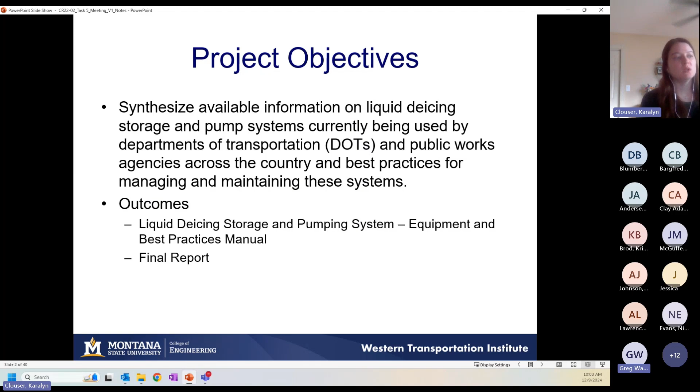Perfect. Thank you, Greg. Thank you, everyone, for joining us. This is the final webinar for best management practices for liquid de-icer storage and pumping systems. So today we're going to go over the content of the final report for this project. And just as a reminder, the goal of this project was to synthesize available information on liquid de-icing storage and pump systems currently being used across the U.S., and then the best practices for managing and maintaining these systems. So the two major outcomes of this project were a standalone best practices manual and then the final report, which we're going to go over today.

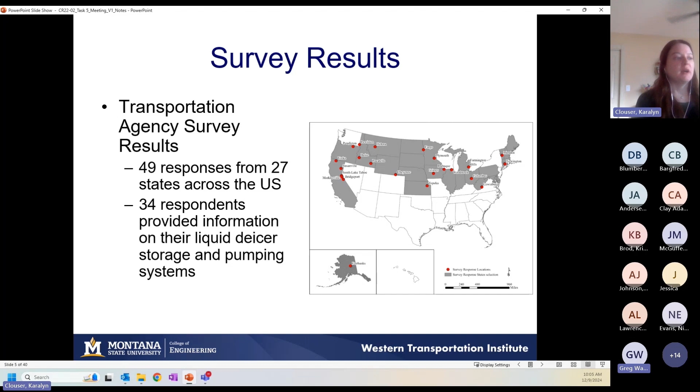So jumping into the survey, it was used to collect information on liquid de-icer storage and pumping systems that were being used across the U.S., and then those best practices and lessons learned from those that have been operating and maintaining these systems. The survey received a total of 49 responses from 27 states, and 34 of the respondents provided information about their storage and pumping systems. And what we found was there was not a consistent system being used across the survey participants. Instead, they helped to identify 19 manufacturers and 5 equipment suppliers of storage tanks, pumps, motors, and those fittings and piping.

Focusing in on the lessons learned from the survey respondents, respondents were asked to share what parts they saw commonly failing or those parts that they're keeping on the shelf in case emergencies happen. So pumps, fittings, and hoses were by far the most common responses. Several respondents had noted failures as a result of needing some sort of preventative maintenance plan, including the need to keep this system cleaned and circulated and making sure that pumps and fittings are checked regularly. Nebraska DOT shared the need for operator training in order to reduce errors, and another respondent had specifically assigned personnel to keep their systems regularly cleaned and maintained.

Several respondents highlighted failures in their pump systems. This included Caltrans, who mentioned that they had needed to switch from those plastic pumps to stainless steel pumps, noting that the plastic pumps were failing after just a single season of use. Maryland DOT mentioned having issues with their system auger jamming during cleanout due to using dirty salt, and that because of this, they were now requiring salt vendors to provide solar salt.

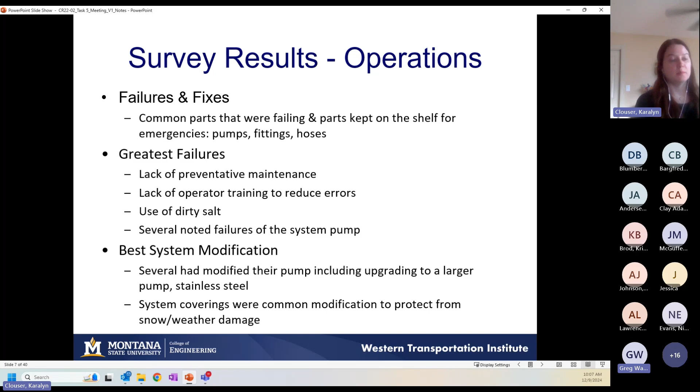Respondents were also asked to share details on the best modification that they had made to their system. So several had modified their pump as a result of failures. And this included either upgrading to a larger pump or going from those plastic pumps to stainless steel ones. System coverings were also a common modification to help protect the system from weather and snow damage.

Several lessons learned were shared by the survey participants. Number one was keeping the system clean and making sure that the material that's stored in the tanks is being regularly recirculated.

This would, keeping things clean, include cleaning and lubricating pumps, flushing out pumps at the end of the season, using fresh water, and using clean salt if possible to avoid buildup in the tanks. Again, preventative maintenance was key. Massachusetts DOT noted that a lack of preventative maintenance was their biggest failure, and that since implementing a preventative maintenance program, they had been able to increase their operations while reducing failure.

Both the city of Columbus, Ohio, and South Dakota DOT noted that limiting the number of staff who operated their brine system had helped to reduce issues and ensure that the system was being operated and maintained in a consistent manner. Oregon DOT shared that they label all of the lines in their systems with the correct flow pattern to quickly isolate any system failures. And then finally, Idaho Transportation Department shared that they were protecting their system from snow sliding off of the tanks and hitting system plumbing by repurposing old traffic signs and creating little A-frame coverings.

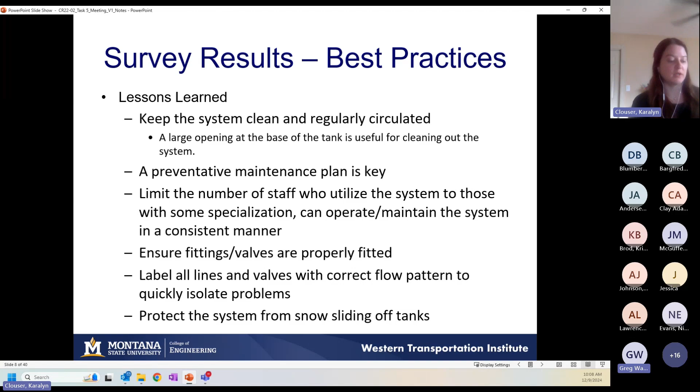So after the survey, we followed up with several of the participants to learn more about their system and some of the best practices that they had shared in the survey responses. Through this task, we were able to follow up with Alaska, Farmington Hills, Michigan, Iowa, Idaho, Kansas, Maine, Massachusetts, Nebraska, Oregon, and South Dakota. I'm just going to run through the key takeaways and common findings from these interviews, but I do want to highlight that several of the best practices found in this task are in the best practices manual, which I'm going to talk about in a little bit.

So for the liquid de-icer storage and pumping system facilities, several agencies mentioned to be prepared for your system to evolve over time and to not be afraid to get started and to start simple. This came up with the Iowa DOT interview, where they talked about starting with a really grassroots approach and then building up their storage system over time as they had funding, and with the city of Farmington Hills, where they started out pre-wetting their salt using an overhead shower bar and have since built a state-of-the-art indoor liquids facility back in 2015.

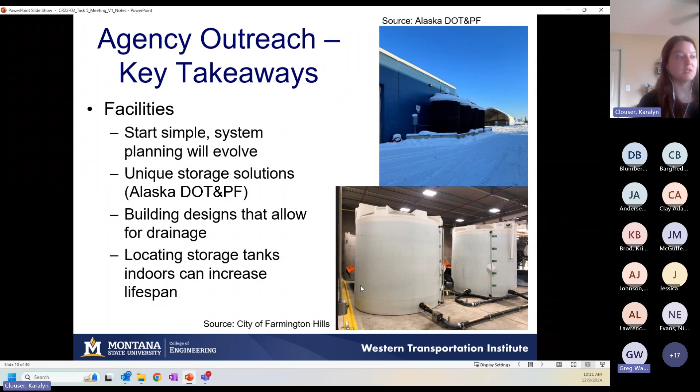City of Farmington Hills talked about their indoor liquids building, there's one picture of it here at the bottom, where they had designed this indoor liquids facility to have a sloped floor. So any liquid or debris that gets spilled moves down the slope into a pit area that they can then clean with a Vactor truck. Finally, several of the interviewees noted that ideally storage tanks would be located indoors in order to reduce UV damage and increase the lifespan of their tanks.

Key takeaways for the storage tanks themselves. Having tanks on a regular replacement schedule can reduce those catastrophic failures. Idaho Transportation Department specifically noted that they replaced tanks on a 10 to 12 year cycle after they had 4 tanks rupture at 2 separate sites. Kansas, Nebraska, and South Dakota DOTs were utilizing fiberglass tanks, so they were unique from the other interviewees. They chose fiberglass because they found that it didn't fail catastrophically and instead tended to leak or seep. Another benefit was more precise fittings, and they found fiberglass tanks were cost competitive to poly tanks, particularly with larger capacity tanks.

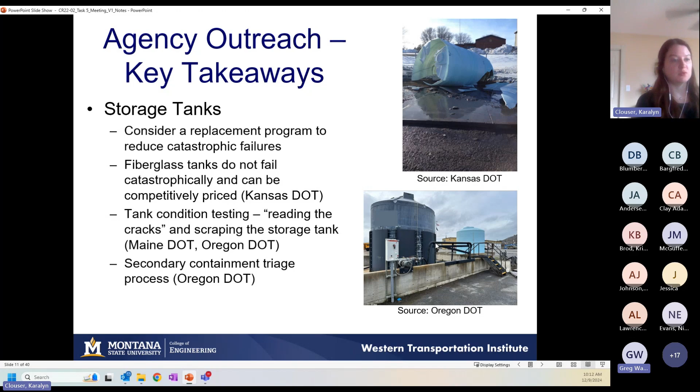Several tank condition testing methods were identified in the interviews. I'm going to highlight these later in the best practices manual section. Most of the interviewees that we talked to did not have or need any form of secondary containment for their storage tanks. However, for those that did, concrete barriers were by far the most common, as you can see here on this picture from Oregon.

For the pumps and motors, all interviewees were completing some form of end-of-season maintenance for their pumps. At minimum, this was flushing that pump out with water. However, several were also applying a corrosion preventative, and this was typically RV antifreeze or windshield washer fluid.

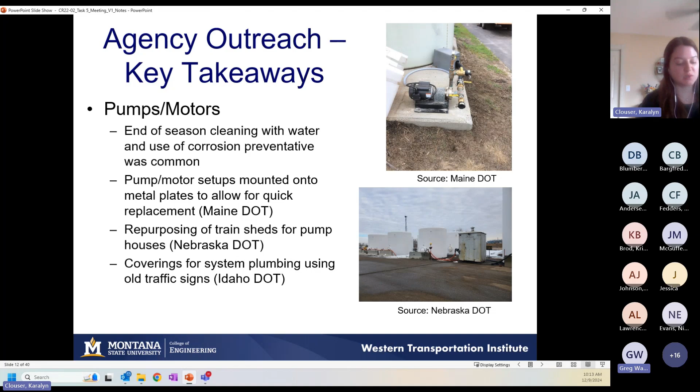Nebraska DOT shared that they had repurposed train sheds to use as pump houses, and this was helping to protect their pumps and motors from the elements. And then the last takeaway here was from Idaho Transportation Department. Again, this is where they were using the traffic signs to cover up their system plumbing. And this had been implemented because they had issues with snow sliding off of their tanks and damaging some of the plumbing to the tanks.

Key takeaways for maintenance and cleaning. Several noted keeping things clean is key. Several also noted that they were using mined salt, which was causing issues with insolubles falling out of suspension. And this was resulting in debris building up in the bottom of the tank and creating a sludge at the bottom of the tank.

City of Farmington Hills shared that they use an air purge system to clean liquid out of their fill point hoses. So this not only keeps the hoses clean and prevented contamination between liquids, but it also had a benefit of reducing the weight of the hoses for their operators.

Several interviewees noted that they have a typical schedule for system inspections. So Iowa DOT was completing an inspection every spring and fall. Maine DOT has each site complete an in-depth inspection in the spring, and then every month they do a general building inspection, which includes things like putting eyes on the system and then recirculating any material that's left in the storage tanks. Some did share a formal checklist or guidebook, and these are shared in the report. And I'll talk a little bit about those later in the best practices manual.

And then Maine DOT shared that they have a single person who travels statewide to help repair and maintain their liquid de-icer storage and pumping system. So this helped to ensure that repairs and maintenance were done in a consistent manner. And it also reduced challenges with locating necessary tools and parts in order to do any sort of repairs that were needed. And they found this position to be a really good use of time and resources.

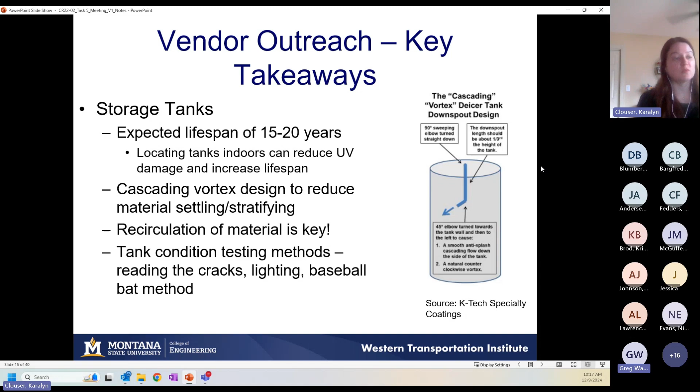The vendors suggested a couple methods for testing tank condition. This included checking that tank periodically for cracks and crazing, so those hairline cracks. And then the baseball bat method, which is where you remove all the liquid from the tank and then you hit it with a bat and see how it reacts.

For pumps and motors, vendors stated that pumps can be expected to have about a 2-year lifespan with proper maintenance, and this should include things like periodically flushing the pump with water and inspecting the seals and bearings. One vendor did recommend that locating pumps and motors indoors or utilizing some form of covering can help increase the lifespan of your pumps and motors.

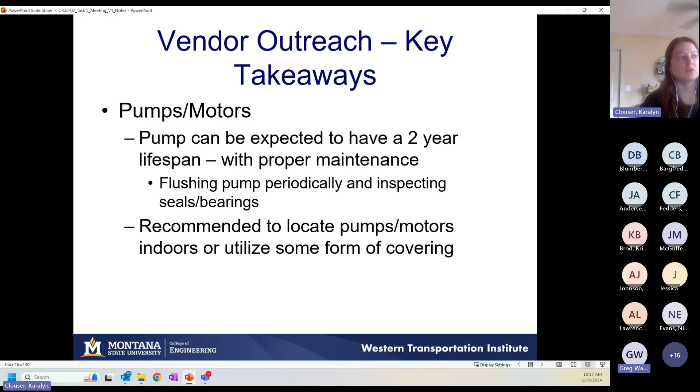So now I'm really going to get into the major deliverable for this project, which was the best practices manual. Information that was collected from the agency and vendor interviews and surveys was used to develop this manual. And it's organized under the following sections: there's introduction, system considerations, the equipment replacement program section, a maintenance and inspection section, and case studies ranging with systems from those that are maybe starting out to in between to more advanced.

And then with the manual, there were a few standalone deliverables that were developed. This includes an inspection checklist, what we're calling the 911 box, which is a list of recommended parts to keep on hand for emergencies, and then a safety considerations poster or flyer that could be hung up in a shop.

So the manual starts out highlighting the steps for implementing new technology or equipment. This includes considering your goals, so thinking about what you need versus what you want, researching your options, so taking the time to learn about what's out there from vendors and suppliers, and then learning from your peers. So consider things like site visits or talking with your peers, maybe looking at some of the interview findings from this project, just reaching out and learning from others that have used these systems.

Next, think about your unique situation. So what are your storage needs? Do you have electricity on site? Are you going to purchase brine or manufacture brine? All of these things will come into play. Then think about your future operations. So this is really where you're setting yourself up for success by planning for your future growth and then planning for equipment replacement so you can be proactive rather than reactive. And then finding your happy medium.

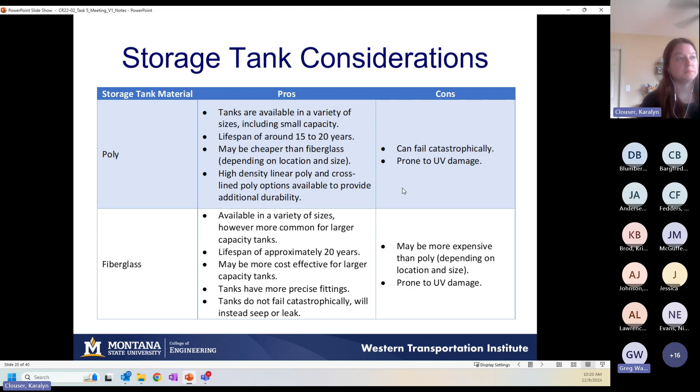So beyond the tank material itself, there are several considerations. As I mentioned, both poly and fiberglass tanks are prone to UV damage, which can cause that tank to become brittle over time. So an agency may want to consider locating tanks indoors or under a covering to prevent this damage. However, this is not always an option due to site characteristics or cost. The end location of tanks can significantly affect transportation fees when purchasing a tank. So purchasing tanks through nearby vendors may be most cost effective for an agency.

And then once that tank is on site, some things to consider include whether your agency has the appropriate equipment and staff training to lift these oversized and awkward objects, or whether you should bring in someone that can safely set that tank in place. Next consideration is the specific gravity rating of the tank, or its ability to hold materials. The storage tank should have a specific gravity rating higher than the specific gravity of the heaviest liquid which will be stored within the tank.

Next, system plumbing is discussed. That plumbing should include multiple shutoff valves between tanks to allow for isolation and redundancy. This helps to isolate any problems, prevent contamination between tanks, and prevent any loss of product should there be a failure. Finally, the manual discusses the material for the storage tank foundation itself. Concrete, sand, and Portland cement are recommended materials as they will allow the tank to safely expand and contract with varying temperatures without causing any damage to the tank.

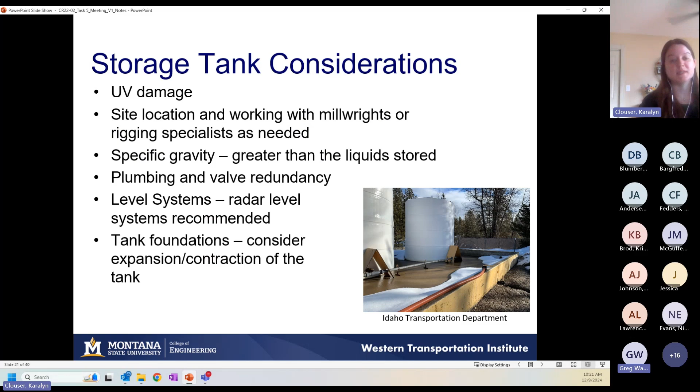Next, the manual discusses secondary containment, so preventing spills or the release of substances into the environment should a tank fail. Every state and organization has different requirements for secondary containment of de-icers. And most of those that we spoke with in the interviews and through the surveys were not utilizing any form of secondary containment. For those that did require secondary containment, generally this should accommodate 110% of the capacity of the single largest storage tank in your tank farm.

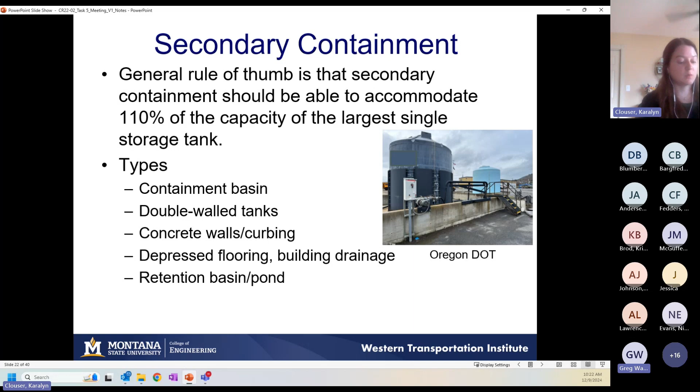Containment options included things like containment basins, double-walled tanks, concrete walls and curbing, depressed flooring, building drainage, and retention basins or ponds. In this section, we highlighted the Oregon Secondary Containment Risk Assessment form because it provides a really great guide to help your agency determine if they should think about secondary containment. This form walks through several factors, including drainage around the tank, the presence of nearby surface water or other sensitive water sources, and the presence of nearby agricultural or residential areas, and you total it up and it'll put you at a low to high risk for secondary containment. So this provides a nice guide for those that may be thinking about something like this.

Next, the manual discusses truck fills. So in determining the appropriate pumps, motors, and pipings for truck fills, there are several questions to consider. So first, what are you filling? Are you looking at a lot of things like saddle tanks, which are upwards of 500 gallons, to those larger direct liquid application units, which are upwards of 5,000 gallons?

So then think about whether you need variable flow pumps. So if your agency is filling multiple sizes of truck tanks, then a variable flow pump might be the most effective, as you can adjust that flow rate depending on the size of the unit that's being filled. One note here, and I'll talk about this again in the safety considerations section, is pump capacity can range depending on the hose diameter, but when determining hose diameter, remember that the weight of that hose with liquid moving through it can get heavy really quick. Just thinking of safety of your employees.

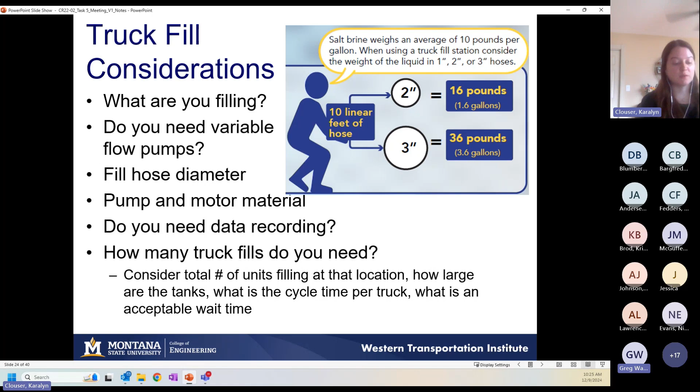So for truck fills, there really is no one-size-fits-all solution for determining how many truck fills your agency should have. Instead, we recommend considering the number of units filling at the location, how large the tanks are, what the cycle time is per truck, and then what is an acceptable wait time. And then keep in mind that your truck fill can be built out over multiple seasons in a modular format as needed.

The equipment replacement program section highlights all of the factors which are going to impact the life cycle of your equipment to help prepare an agency to keep these things on a consistent maintenance and replacement cycle. So for storage tanks, the expected lifespan is upwards of 20 years with proper care and placement. Things to consider include the tank materials, so poly versus fiberglass, the tank location, whether it's indoors and covered, protected from that UV damage, which can increase the lifespan, making sure that the tank is properly ventilated during the warmer months, and then making sure that the tank is the appropriate specific gravity rating for the material that's being stored within it.

For truck fills, an expected lifespan is 10 to 15 years before full replacement. Again, things will last longer with proper care and maintenance. Hoses will last about 10 to 15 years on average, as long as they're not being left outdoors, exposed to the elements, dropped, and driven over.

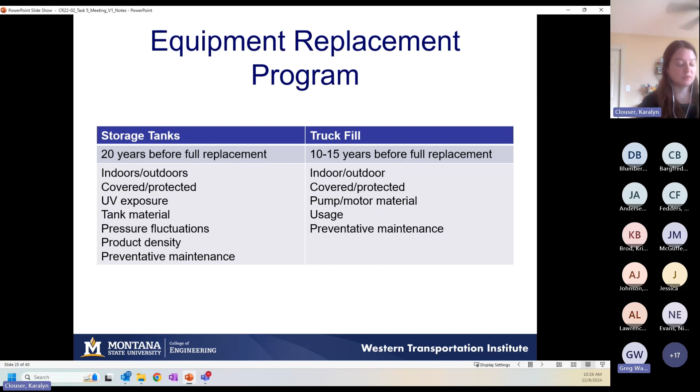To properly maintain equipment, routine inspections should be utilized. So a preventative maintenance plan that has several sets of eyes on the system looking for issues can ensure that things continue to run smoothly. So most agencies are completing an inspection before the winter season and then again in the spring. However, additional periodic checks of the system can help the agency proactively catch issues as they arise instead of reacting to major issues. So for this, we used some of the inspection checklists that were shared with us from the interviews task, and then Mark's expertise to develop an example inspection checklist.

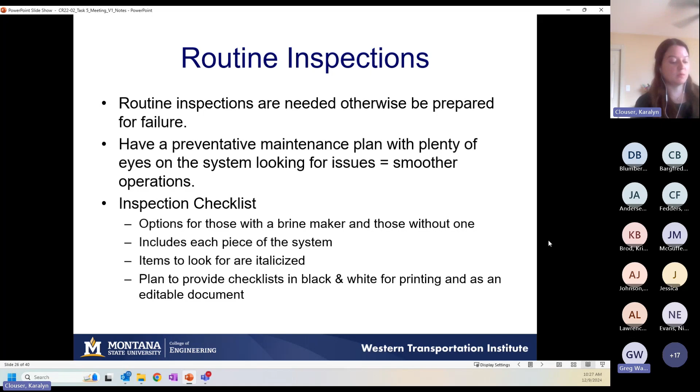So for the feed line from the brine unit, the checklist includes looking for leaks, checking and lubricating fittings and valves, checking the piping, and then ensuring that if there is an air purge, that it is operational. For the brine tank section, users will check intake fittings, valves, the access port, whether the tank is breathable, whether it needs to be cleaned. They'll check the tank for visible cracking, stress, or deformations. Then check any lighting, the outlet piping, and whether the material in the tank has been recirculated.

And then the last section of the checklist covers the truck fill. So this again has, you look for leaks, check and lubricate fittings and valves, examine that piping, including whether it's safely manageable by staff. And then if there is an air purge, making sure that it's operational. Last, the checklist has users make sure the pump has been properly maintained for post-season.

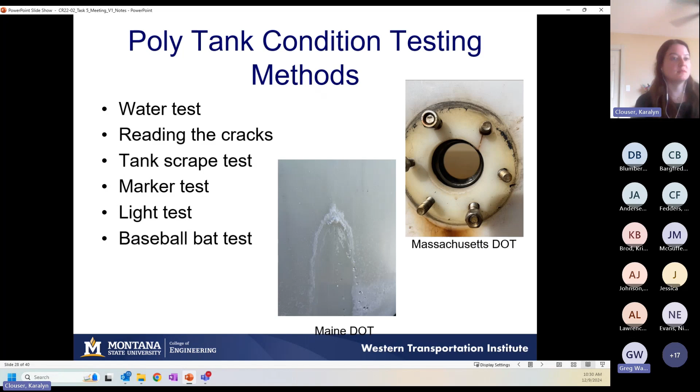We then highlight some of the maintenance best practices that were shared in the agency interview. So first is recirculating the material in the tank. This is particularly important for de-icer products that contain fines or insolubles or contain blended chlorides and organic components where you have things falling out of suspension and potentially building up in the bottom of your tank. So for this, we shared Maine DOT's calculation to determine how long to recirculate the material in the tank, which is based on the number of gallons stored in the tank and then the size of the pump that's being used to recirculate the material.

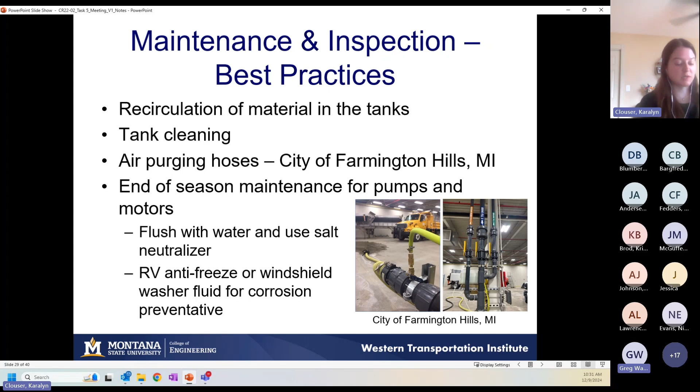We discussed some storage tank cleaning options. So most agencies are using a Vactor truck and pressure washer, but it does discuss how some are contracting out this cleaning in order to avoid having to maintain additional equipment. We shared the City of Farmington Hills air purge system for their fill point hoses. And then last, it discusses end of season maintenance for pumps and motors. So this includes flushing that pump with water, using a salt neutralizer, and then potentially using a corrosion preventative like RV antifreeze or windshield washer fluid.

The manual then shares some best practices for repairs. So this includes the consideration of having a more statewide or regional maintenance supervisor to ensure that regular maintenance and repairs are being done in a consistent manner. We shared the best practice from Maine, where they have their spare pump and motor setups mounted to plates, which can be easily swapped out for repairs.

And then last, this section talks about keeping parts on hand to be able to quickly handle repairs as they arise. So most local depots are keeping a smaller stock of parts on hand, like hoses, clamps, and fittings. And then some will have a central storage of parts, which will include larger items like pumps and motors. So for this, we did create what we're calling the 911 box.

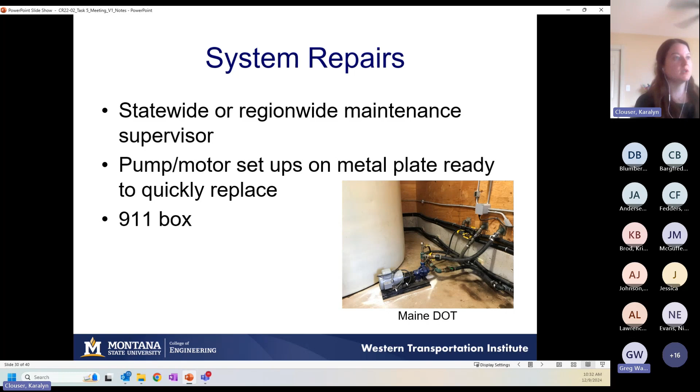So this is the recommended parts and supplies list to keep on hand. So for that local depot, assuming 2 tanks and 2 truck fills, it has those local depots keeping things like hoses and then fittings, pressure clamps, gaskets, and valves for each hose diameter.

And then at that central facility, which is serving potentially 4 to 6 local depots, you're looking at larger amounts of hoses, fittings, pressure clamps, gaskets, valves for each hose diameter, and then truck fills and truck fill pumps and motors, and then 1 truck fill station that's ready to go.

And then each agency should consider things like whether they can easily obtain replacement parts, maybe from a nearby vendor, and then what level of downtime is acceptable, as this will really help you to determine what level of parts to keep on hand.

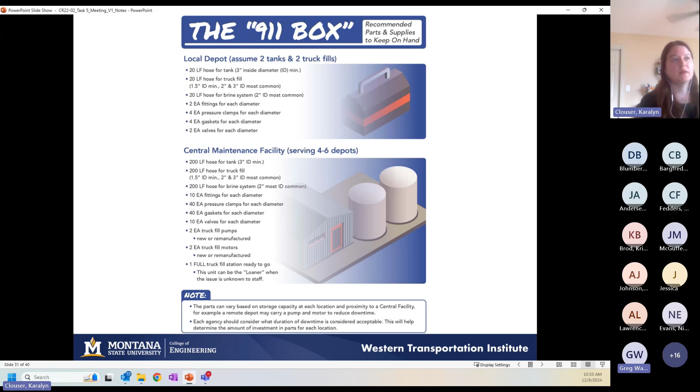Next, since working with these systems can be dangerous, we also developed the safety considerations poster or flyer. So this includes things like personal protective equipment to keep on hand, like safety glasses, gloves, long sleeve shirts and pants to protect you as you're working with these systems, lockout, tag out when working with electrical equipment,

a reminder that the storage tanks are a confined space and that OSHA regulations should be followed regarding confined spaces, pinch points when working with pump impellers, lifting and handling equipment, including a reminder on how much that fill point hose can weigh when it contains liquid, systems under pressure, including reminders to check for secure fittings, sharp edges, and then slippery conditions. And we developed this thinking it could be something that could potentially be hung up in a maintenance shop. This is a gentle reminder.

So the last section of the best practices manual walks through some case studies which describe liquid de-icing storage and pumping systems ranging from starting out to in between to more advanced. So each case study provides examples of typical equipment you could expect to see, a description of what you can expect out of that system, the potential costs, personnel requirements and trainings, and then next steps. So if you were going to build upon that system, what would the next step look like?

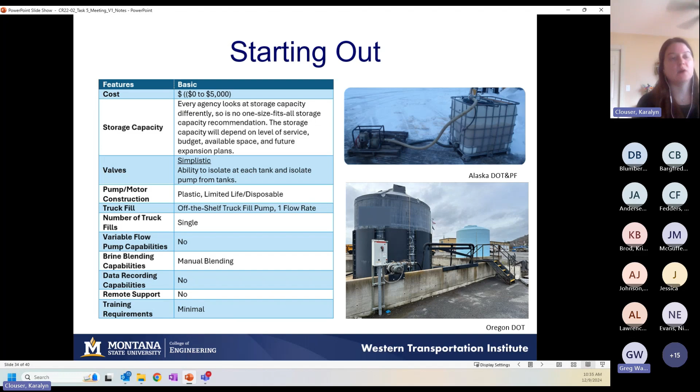And then when you're looking to build upon this basic system, you're referring to your wants list. And then we recommend planning deliberately to try to build out your system in a modular format so you can improve upon things as funding allows.

For an in-between system, you're looking at a cost of upwards of $20,000. So for these systems, you're looking at things like manual blending capabilities. The system valves are becoming more complex, allowing for each tank to be isolated from one another and the truck fill, and things like stainless steel pumps, which can be rebuilt or repaired.

For the in-between system, you can expect stack blending. So as liquids are loading into the truck, they blend themselves as it moves around in the tank. Blending is done by visual means or timing the flow of the liquid to determine the volume being dispensed. So these systems do require extra attention when blending and need trained staff because there's lots of moving parts and things that can go wrong when valves are open and closed during mixing and filling.

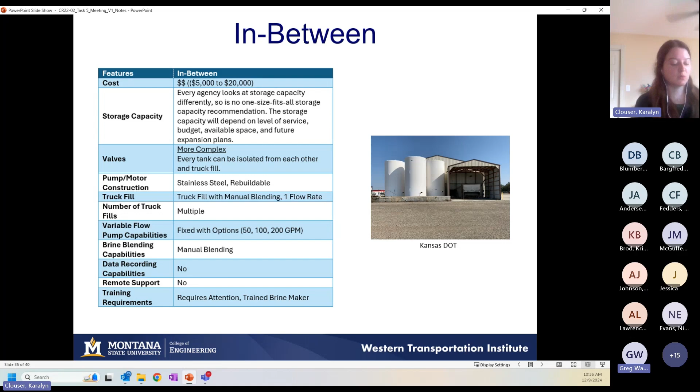So then when you're looking to build upon this in-between system, you're really looking at those more advanced systems with features that would help automate operations. So for the more advanced system, you're looking at costs upwards of $40,000 and above. The more advanced systems have features like automated blending. These systems allow you to create some pre-programmed blends in the form of percentages of each product.

These systems tend to have data logging capabilities and can allow for remote access into these systems. And then another perk of the advanced system is that variable truck fill rate, which is extremely beneficial for agencies that are filling up a variety of truck units. So those automated systems really create an easier environment for operations staff, and they may reduce the oversight and supervision required to ensure that the operations staff are using the correct products, especially when you're using blends.

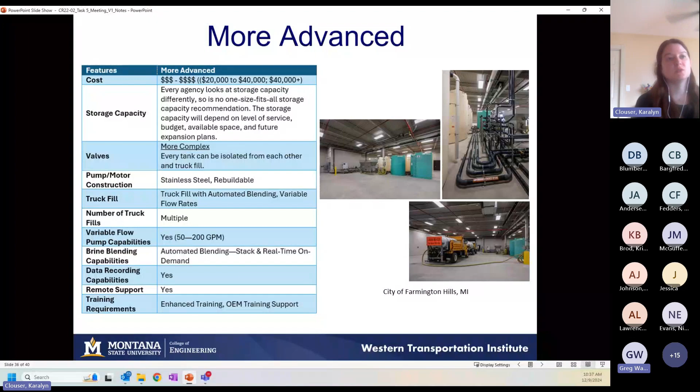However, these systems do have advanced training requirements. OEMs that create these advanced systems do tend to offer training, and they do also have the benefit of generally being able to remote access in to troubleshoot issues that should arise. So advanced systems are often built with a modular construction in mind. So when you're looking to build upon these systems, you're looking at replacing and enhancing what you need instead of needing to invest in a whole new system.

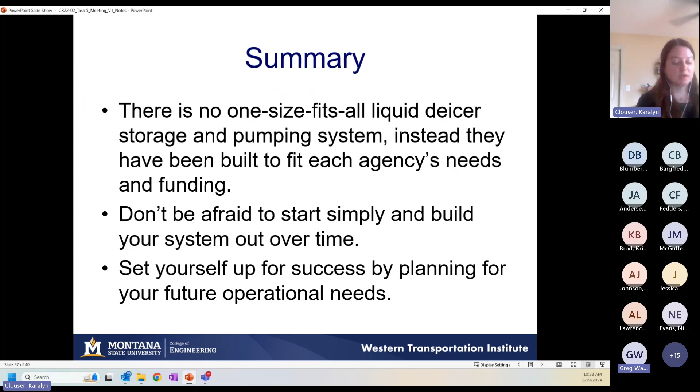So wrapping up this project, in summary, we did not find a single one-size-fits-all de-icer storage and pumping system amongst the survey and interview participants. Instead, these systems were all built to fit each agency's needs and funding. However, some of the best practices and lessons learned from those operating and maintaining these systems can help support other agencies as they look to maintain their existing equipment or look to implement new technology. First is to not be afraid to start simply and build your system out over time. And then make sure that you're setting yourself up for success by planning for your future operational needs.

Some additional best practices include keeping in mind that your system lifecycle planning is going to evolve and you need to be flexible. Make sure that you're being proactive rather than reactive to system maintenance by regularly inspecting and maintaining your system components. Think about developing an inspection checklist or using the one that was developed as a part of this project to ensure that your employees are keeping an eye on the system in a regular and consistent manner. Keep a stock of supplies on hand for emergencies to help avoid potential downtime. And then last, do not forget about the safety of your employees who are operating these systems.

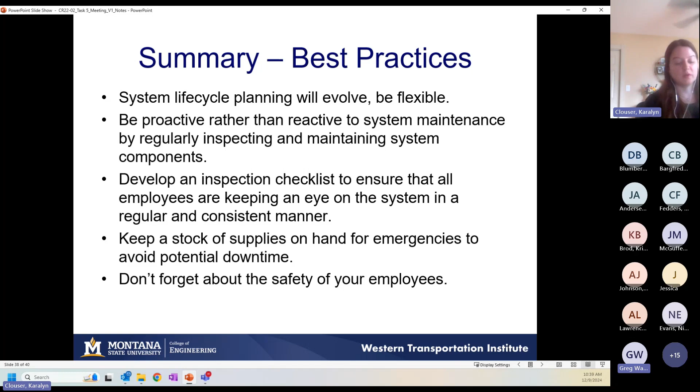So throughout the project, there were some future research needs identified. The first was the need for technology transfer. So throughout the survey and interviews, we heard from several folks a desire to learn how others are operating and maintaining these systems, and particularly how they're solving problems that arise. So this really highlighted a potential need to either create training materials related to the findings of this effort or present them at conferences, but it also highlighted a need for ongoing tech transfer through things like a working group or roundtable that meets periodically to share experiences and allow others to learn from their peers.

Next, research needs included an examination of what we're calling the no tank option. So some agencies could skip storage tanks altogether and have a direct truck fill from their brine system to help eliminate some of the challenges of maintaining this equipment. However, the truck fill option is only possible in certain conditions, and that brine system needs to be able to manufacture brine at a rate within a standard truck fill rate. So this research effort could examine that no tank option further and make recommendations. The last is an examination similar to this effort, but focused on the brine making units themselves to learn about the best practices and lessons learned from those that are operating those systems, as they were outside of the scope of this project.